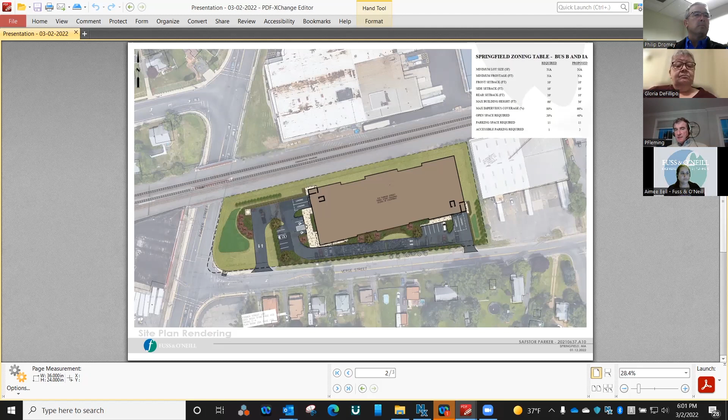Thank you. Now, this is going to be 3 stories, is that correct? Yes, that is correct. How many storage units, individual units? Did I miss that? No, I think the next slide gives a bit of a presentation, a visual of it. It graphically answers part of the question, and perhaps Mr. Argo can expand a little bit upon how this operation functions.

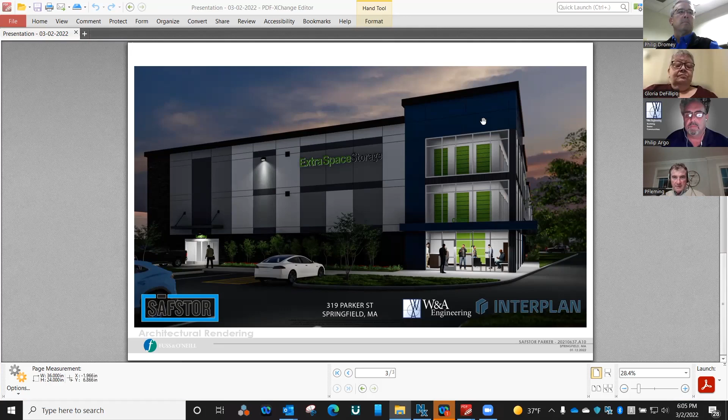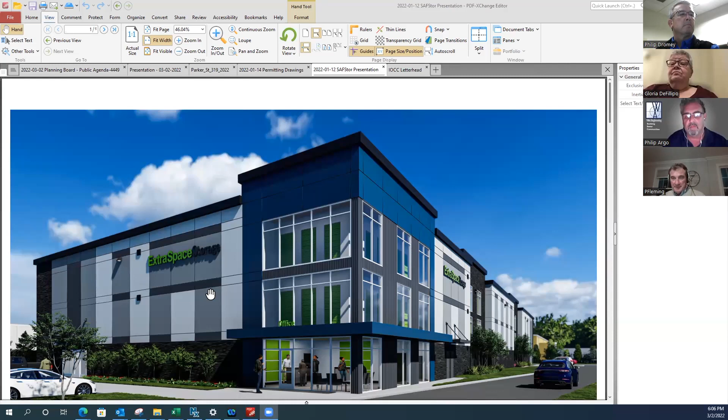Well, I think as Philip had just explained, it has that nice kind of differential on the ground floor. Aimee, I think you may need to stop sharing. Okay. And then I will, as Aimee said, ask if everybody can see. You're either seeing somebody's advertising Zoom or you're seeing the building. We're seeing the building. Good, okay.

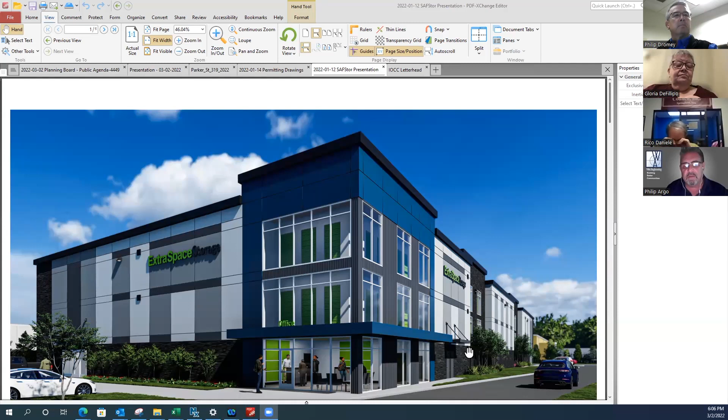So, Philip, this is what you were just describing. Right, where your cursor is, you can see the stacked stone. The office corner is a slightly different material - it may be some metal panels, I believe. The blue and the gray you see are there to break that up and enhance that corner.

And you can also see some other windows further down in the middle of the building. Again, it's an architectural treatment - it's just a false window, not a window into the interior of the structure. So the way the siding material works here, plus the actual relief in the facade, gives a very nice look. It gives some architectural appeal.

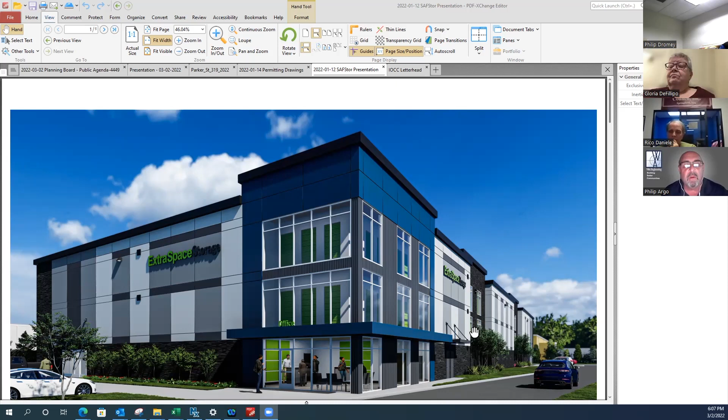The roof line, I think, is constant, would you say? Although it looks a little bit like we're seeing changes in the horizontal plane there. Yeah, it's a flat roof. There are some slight variations in the parapet wall - going around on the office corner, the parapet is a little bit taller, and it just breaks up the straight roof line, giving some variation in height. You can also see the insets in the building.

And if I'm not mistaken, these were some of the materials that this specific picture shows, which is what you presented to the Indian Orchard committee. It is, yeah. And this is typical of all of SafStor's facilities. All of the buildings are shaped a little bit differently to conform to the site.

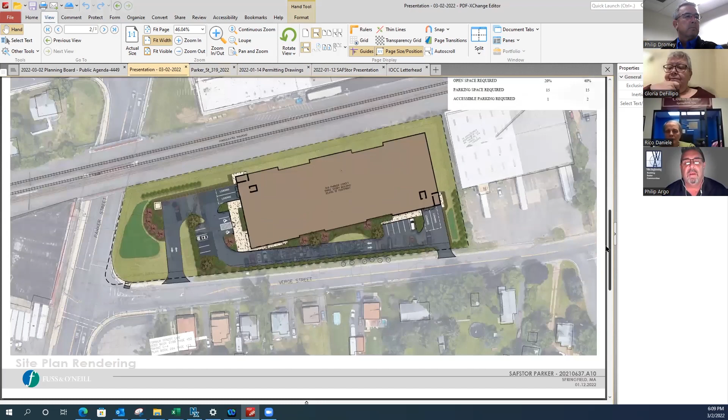They're all using the same, similar materials and colors. All of the lighting is on the building, none on poles in the parking lot. SafStor likes to keep their lighting to a minimum. It's all down-facing, shielded, and primarily at the entrances, mostly for safety concerns. It's not intended to provide a bright, overly bright parking lot.

I believe the detail we last presented to Mr. Dromey had a key indicating the type of lighting and where. Philip Argo, if you could confirm this with me, we had two of these, one on either end, two of these downlights, and then two that are more utilitarian, one at the loading dock and one at this entrance. Yeah, that's correct.

Just to clarify one thing, SafStor does not operate the facilities themselves. They contract with a national operator, in this case Extra Space Storage, to operate the facility, but they will retain ownership of the property.

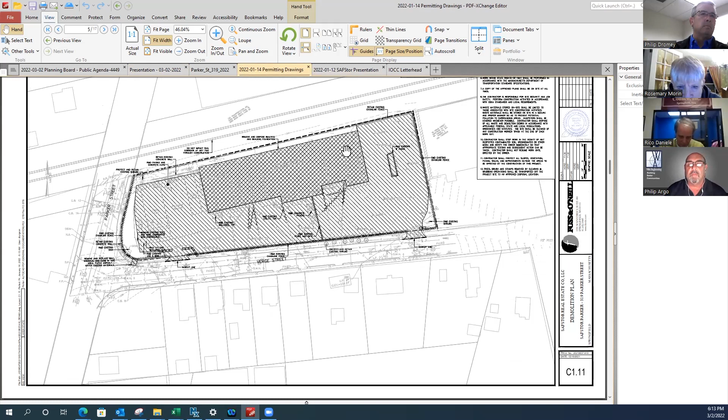Now this side that we're facing, that's the side that faces the houses, right? On the other side? To the right, the houses are to the right of that picture, this is the end, the houses would see this face here. Okay, so they don't see where we were just seeing the lighting and stuff, it's not facing the houses. I'm just concerned with it being a 3-story building, and the lighting and the signage. I know there was some comments about the signage. So my concern was, how is that going to affect the houses on the other side of the street? Not obviously the railroad tracks, but...

Yeah, this is a little busy, but bear with me. Here's one of the detailed drawings. The homes you just referred to are here at the bottom of the page. That nice picture we just saw a moment ago with the face of the building, that's all here, and it's facing out to the residents.

So that is facing out to the residents. Correct. That nighttime image we saw, the shallower length of the rectangle, that's facing what I would say is the side of the property. And that significant drop over here going down to Parker, the railroad tracks are right behind the property here. So how does that lighting affect those homeowners? And what about signage? I know there was some comments about the signage.

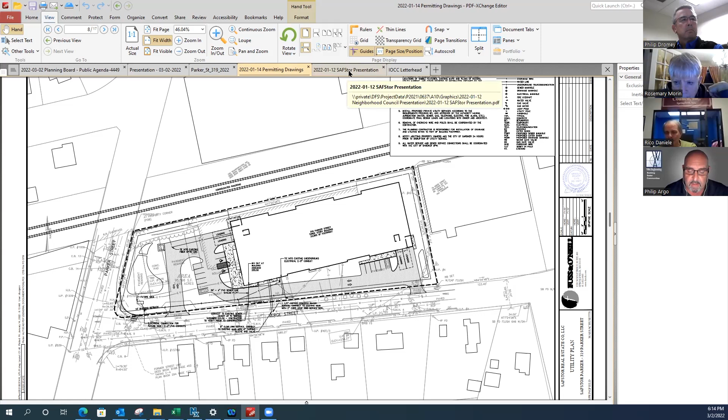Yeah, we did see the comments about the signage and the lighting of the signage, and we understand that the signs will not be able to be lit. I think the comment said past 10 p.m. and before 6 a.m., and we can comply with that. We can put that signage on a timer. The interior of the office, the interior lights will not be on.

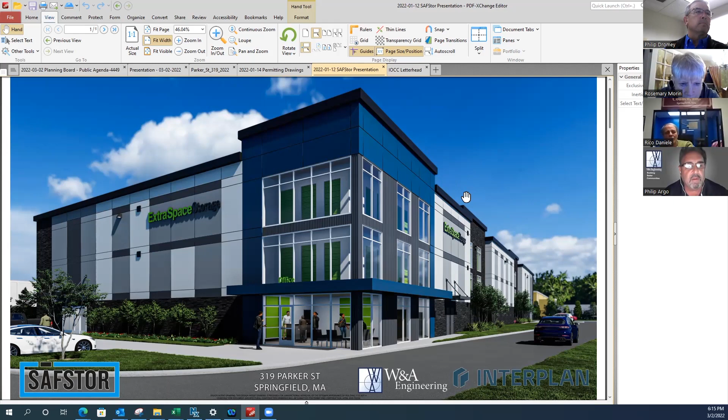There are some canopy lights underneath that light the sidewalk, and lights under the canopies at the loading entrances. Those will need to be on, and again it's a safety issue, but those aren't as big of an issue. But the signage, I can get with our sign contractor and make sure that those can be put on a timer, and any lighting can be turned off at night.

I just have one question, more for Phil. This is about the fourth or fifth self-storage unit proposal that's come up in the last 6 months. Is there any requirement that we're getting oversaturated, or any regulations that could control it? It seems like there's going to be an awful lot of these storage places in Springfield.

I've got to defer to the self-storage guys. To me, it's the same as a CVS or McDonald's, it's just considered an industrial or business use. There's no regulation that says Springfield can only have 10 or 15 of them. For some reason these storage facilities are just popping up now. It looks nice, but it seems like there's quite a few of them coming up lately.

Just a quick note on the signage. I was more concerned with the ground sign, but I do need to let the petitioner know, now that I'm looking at the signage, that having signage above the first floor of the building is going to trigger a special permit through the city council. You're not going to get permitted for those signs without a special permit from the city council, which is a process beyond the planning board. It just hit me now as I see these on the elevations, that is a regulation for the city.

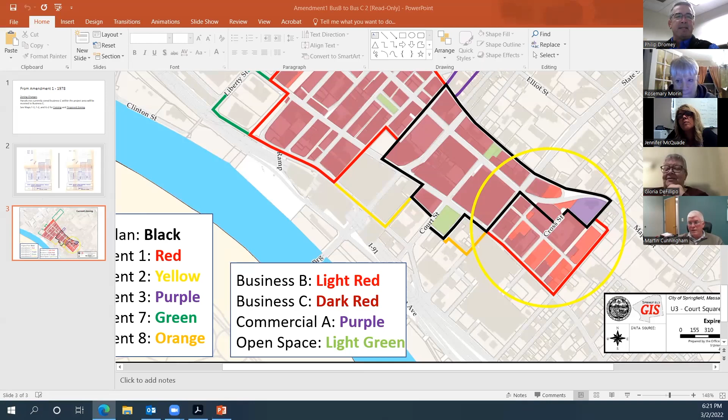It's also funny that in Hampden, somebody wanted to put storage units in, and the people went crazy and voted it down. They shut it down. Well, they should, but I would caution the board that to deny a site plan review, you've got to have pretty specific reasons why you're doing that. And I don't think there's really reasons to...

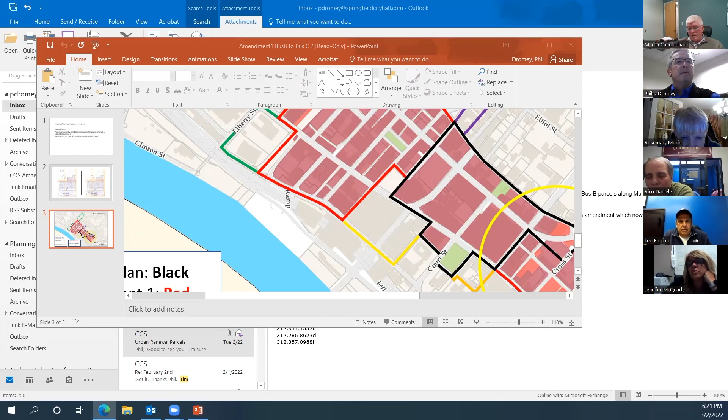Sorry, I'm getting my meeting screwed up here. So I would caution the board on... oh, there we go, sorry... on denying a site plan review.

Again, I don't know what the reason is for why these are suddenly popping up all over the place, but it's not just here, it's all over the country, because I don't get it. Try to get a storage unit. Yeah, can't get one. Maybe we own too much stuff. And there's lots of people selling their homes and moving in with in-laws to save money because the market's so crazy, and it's impossible, and they've raised all their rates too because they can.

Can you guys see that screen? Yes. Okay, so this was the urban renewal plan that was brought to you a couple weeks ago. In reviewing the urban renewal plan, where that yellow circle is, you'll see a number of parcels in red. Those are all zoned Business B. The darker red is Business C. When the urban renewal was originally created, these parcels zoned Business B were supposed to be rezoned to Business C, to match the majority of the downtown. So as they're reviewing the urban renewal plan, they're finding discrepancies with what was originally proposed and what actually happened.

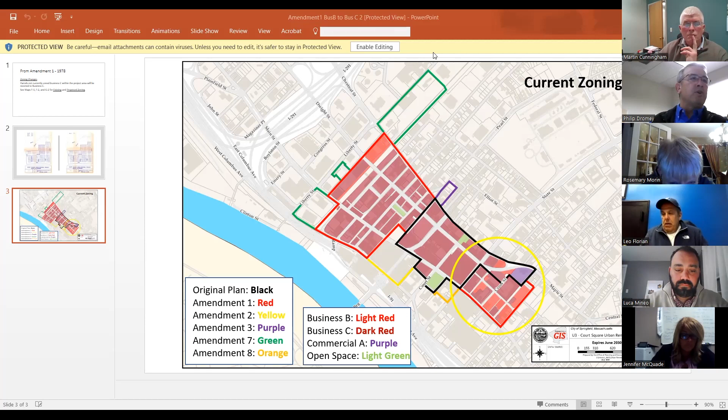Would somebody like to make a motion? I would make the motion to approve the zone change - just to clarify, to approve the petition to move forward for a zone change. Is there a second? Second. Okay, so voting to approve the petition to move forward with the proposed zone change: Mr. Cunningham, yes. Mr. Mineo, yes. Mr. Daniele, yes. Ms. Morin, yes. Ms. DeFillippo, yes. Mr. Florian, yes. Ms. McQuade, yes.

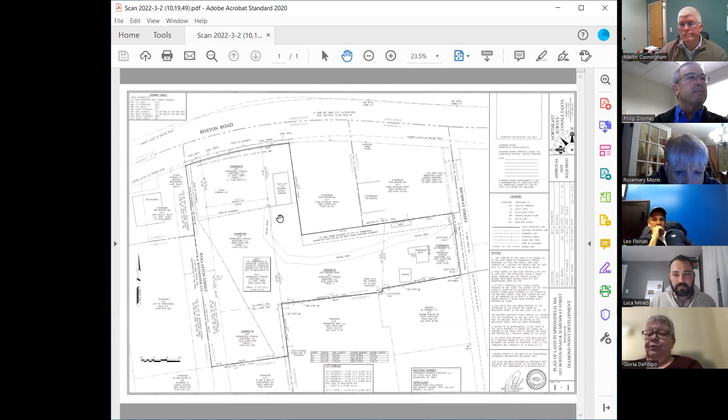Move to approve. Second. All in favor? Aye. Aye.